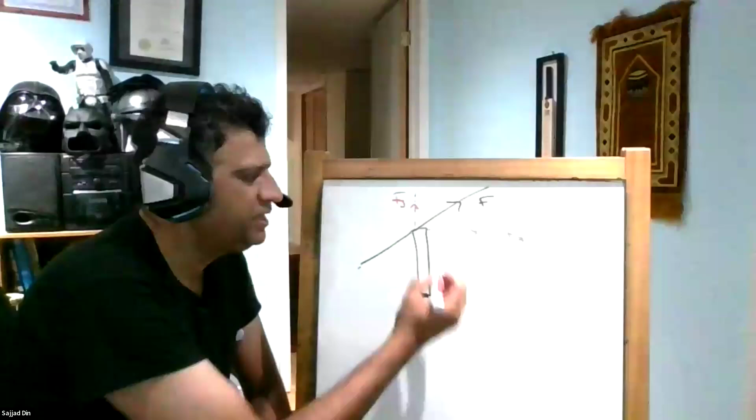So Varignon's theorem, what does it say? That you can split this up into its components, Fy and Fx, and then you can calculate the moment around this. Why? Because this might be a lot simpler. The perpendicular distance might be a lot easier to calculate as opposed to, in this case, where the perpendicular distance is actually this much, but it might be a little bit hard to calculate. So that's what's going on here. That's what we're trying to achieve.

We can now use Varignon's theorem to calculate the sum of the moments around an axis by using the components of the force. So in this case, if you've got F and you're trying to calculate the moment of the force F around A, you can split it up into its Fy component and Fx component, because hopefully the perpendicular distance for this would be easier to calculate. And then all you do is add the moment of the force because of the y component to the moment of the force because of the x component, and that will give you your moment, the sum of the moments.

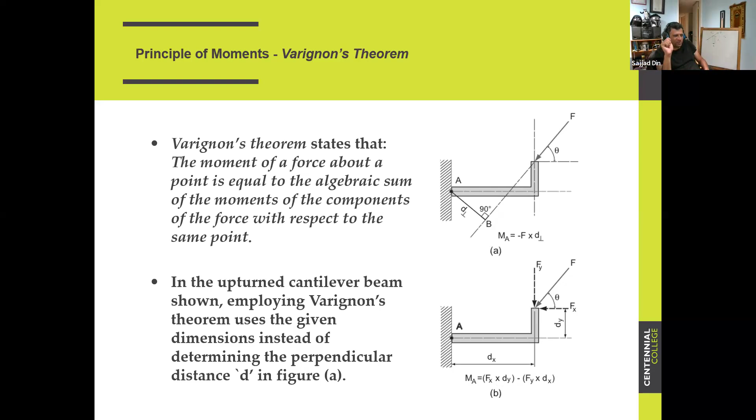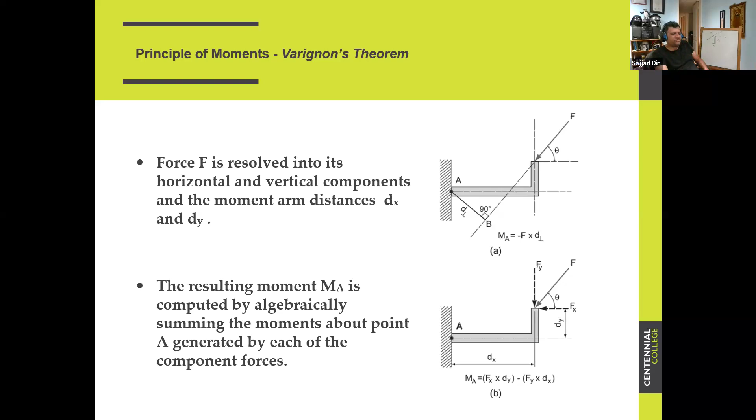And just remember, for Fx, the moment is going to be in a counterclockwise direction, whereas the moment of the force Fy is going to be in a clockwise direction. Always remember, clockwise direction moment is negative. Counterclockwise or anti-clockwise, the moment would be positive. That's basically what these notes are signifying here, that you can now compute the sum of the moments using the components. So let's try to work on a scenario.

So we've got a wind force of 2,000 pounds at an angle of, and I'll give you the angle, from the horizontal. It's applied at a joint A on a roof truss. Determine the moment of the force F about the supports at B and C and the crown at D. So we're going to use the principles of the moments to calculate all that.

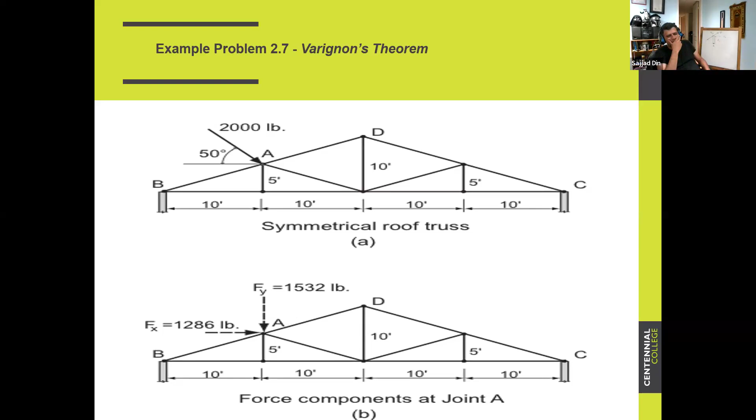So the first thing I want to point out here is that the force is 2,000 pounds. It's at an angle of 50 degrees. So the first thing you want to do is break it down into its x and y components. How are you going to do that? You are going to simply use the angle, 50 degrees, and use SOHCAHTOA. So now that you have Fy, which is 1,532 pounds, and you have Fx, 1,286 pounds, you can now use this information to calculate the moment around the different points.

So let's start off with calculating the moment around B. So if you guys could open this up on your computer, because I can't, I would rather have the focus of the camera on this board or on my desk. To approach this, let's take a look at B. Let's try to calculate the moment of the force around B.

So if you look at the figure, the moment around B is going to be equal to Fy, and you can see in the figure that its perpendicular distance to B from the line of action of the force is 10 feet, multiplied by 10. The next question is, is this clockwise or counterclockwise? It looks clockwise to me, so I'm going to put a minus here. Now let's take a look at Fx. It also looks clockwise, so I'm going to say minus Fx, and the perpendicular distance is 5. Now plugging the numbers in, minus 1532 times 10 minus 1286 times 5.

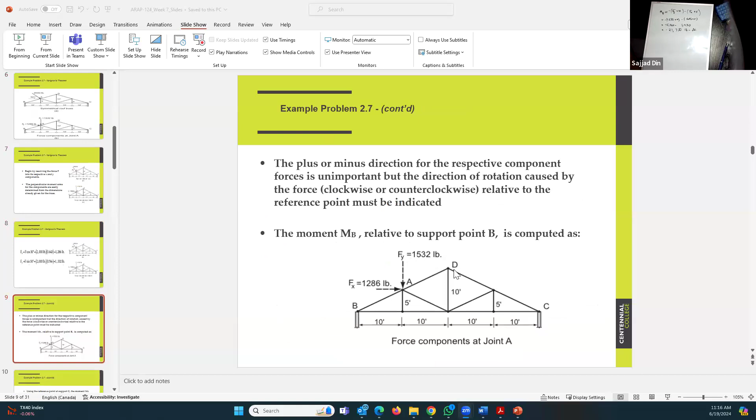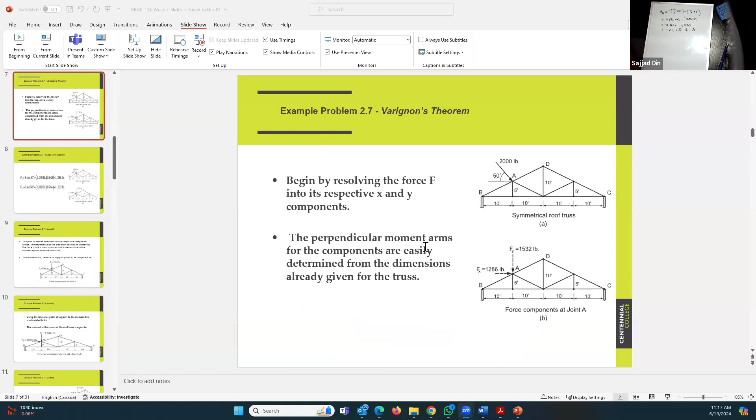Let's go back to, so does this make sense? Right, Fy, that's already done. So when you take a look at the solution, yes, minus 1286 times 5, minus 1532 times 10. So yeah, there you go. We got the right answer. So what I'd like you guys to do is to get the moment of Fy and Fx, the sum of the moments, on D. So I'll give you guys a few minutes to try to do that.

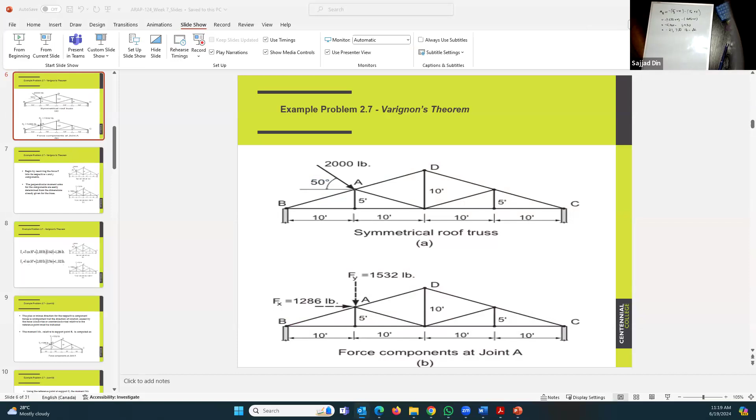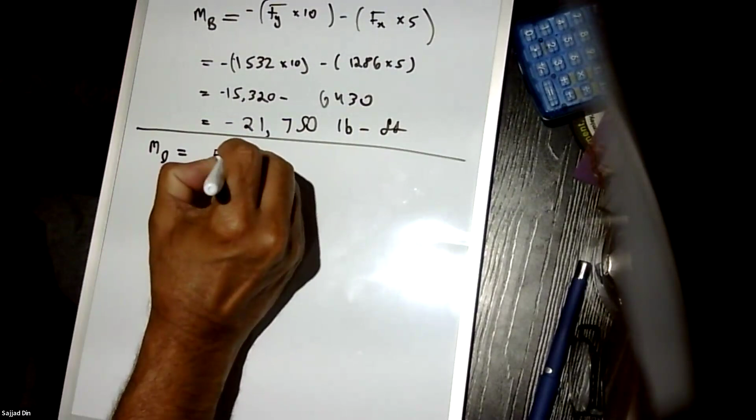Okay, so for MD, I can see that my line of action for Fy is 10 feet from it, and it is counterclockwise, so I'll leave that as positive. And Fx, which is also counterclockwise, so I'll leave that as positive, Fx times 5. So what does that give us? 1532 times 10 plus 1286 times 5.

Answer is 15320. Again, 21750 pound feet, but this time it should be positive.

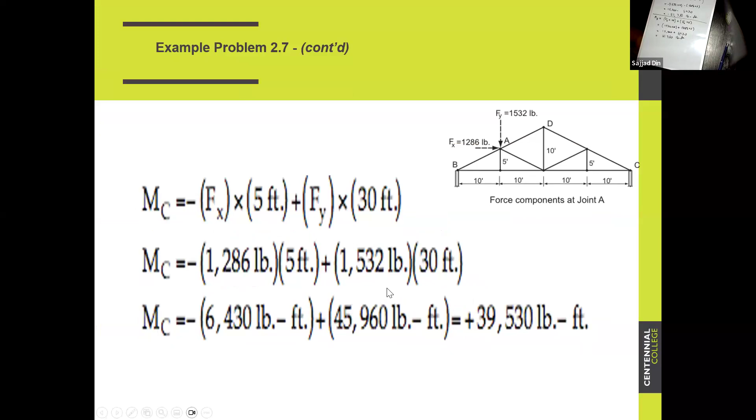I'm a little confused about why D was 5 feet instead of 10. Are you referring to MD when I was calculating MD? Yes. So we multiplied fx by 5 feet. If you extend the line of action of force fx all the way across, what is the perpendicular distance between that line and D? Is it going to be 10 feet or 5 feet? Why would it be 10 feet? The line of action of force passes through here. Okay, I see. So just extend this and then look for the perpendicular distance. Okay, I understand now. Thank you.

And that's going to be the main challenge, trying to figure out those distances. If you can figure that out and you can remember clockwise and counterclockwise, you're going to do quite well with this part of the course, moments of forces. If you don't, that's where the errors set in.

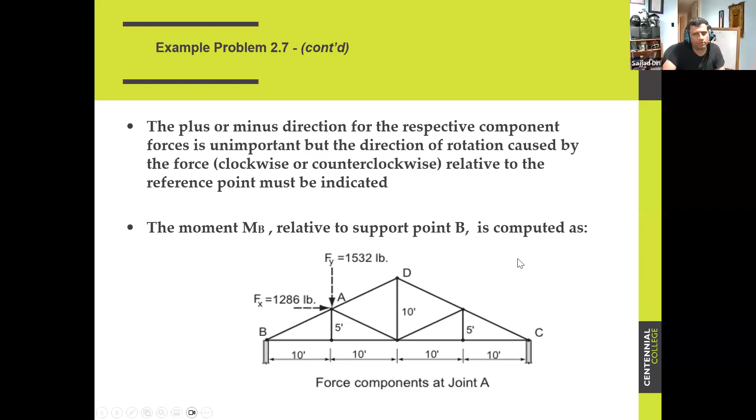So the next example. Well, not example, just a brief discussion on a couple. It's basically an arrangement of forces that creates a rotational effect, and it's a series of parallel forces. And so that's another type of problem that we're going to be solving, where we've got forces that create rotation of a structure or a plank. But the principles are the same for the calculations. But this is the first example.

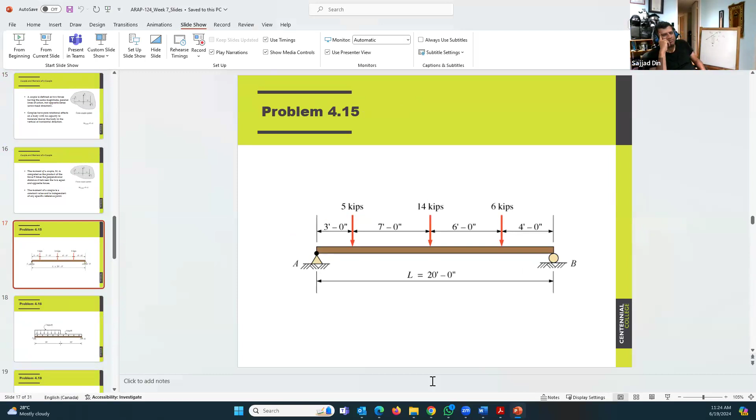So in order to solve this, right now what I'm going to suggest is that you just work on determining the rotational force, the sum of the rotation around A and B. So let's go ahead and try this. So what I'm going to do is I'm going to solve the sum of the moments around A. That's the first thing I'm going to do.

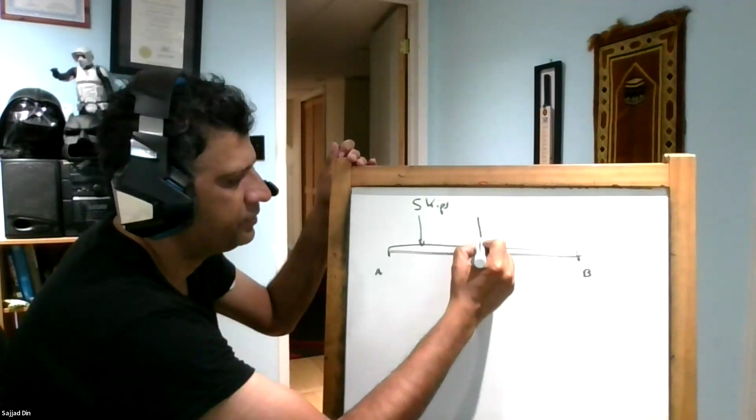But just remember, you've got the plank-like structure. You've got A, and then you've got B. And you've got 5,000 pounds or 5 kips here, 14,000 pounds or 14 kips here, and 6,000 pounds or 6 kips here. So open up your figure so that you know what you're looking at. So let's draw this with a different color. This entire length is 20 feet. Very important. Next, this distance here is given as 3 feet. This distance from 5 kips to 14 kips is given as 7 feet. This distance is given as 6 feet, and this distance is given as 4 feet.

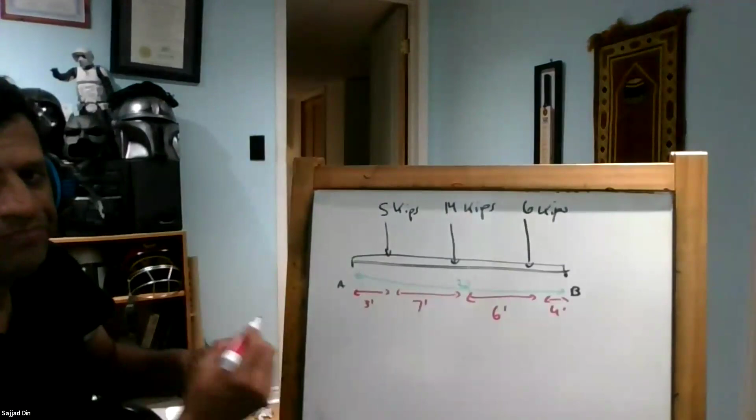So for the moment around A, let's calculate the moment around A. So MA, so the sum of the moment is going to be what? 5 kips times, what is the perpendicular distance? It's from here to here. The line of action of the force, 3 feet. So that's number one. Is it counterclockwise or clockwise? It's clockwise, so it's going to be negative. Remember, if you were to push something around A in this direction, it's clockwise. So they're all going to be clockwise.

So it's going to be 14 times 7 plus 3 is 10. 6 times 6, what is this, 10? So that will be minus 6 times 16. So that'll be minus 15, minus 140, minus, what is that? 6 times 16, 96. What is the sum? 140 plus 15 is equal to minus 251 kips feet, 1,000 pounds feet. Remember, what does kips mean? It's 1,000 pounds. That's what that means.

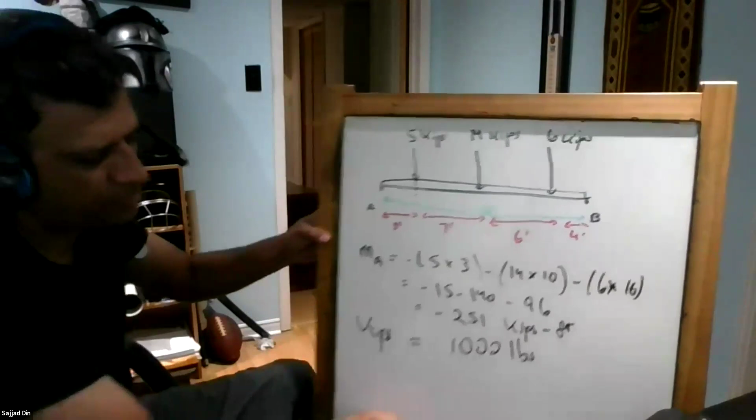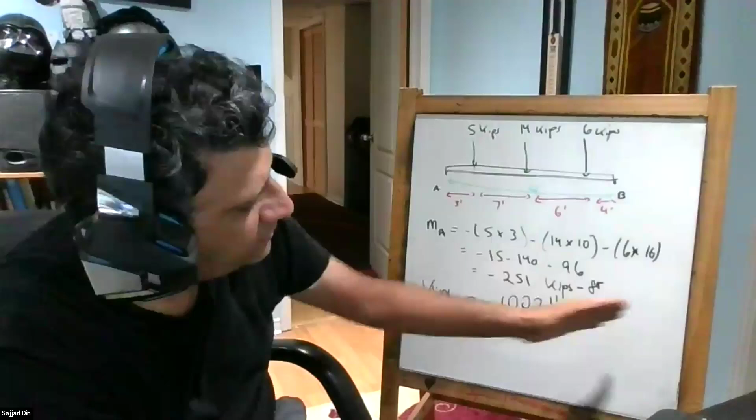So what I'd like you to do now is calculate MB. Got all the forces given. You've got all the distances. Now you're going to be calculating MB, and it's going to be counterclockwise, so that'll all be positive. So I'll give you guys a few minutes to try to calculate that.

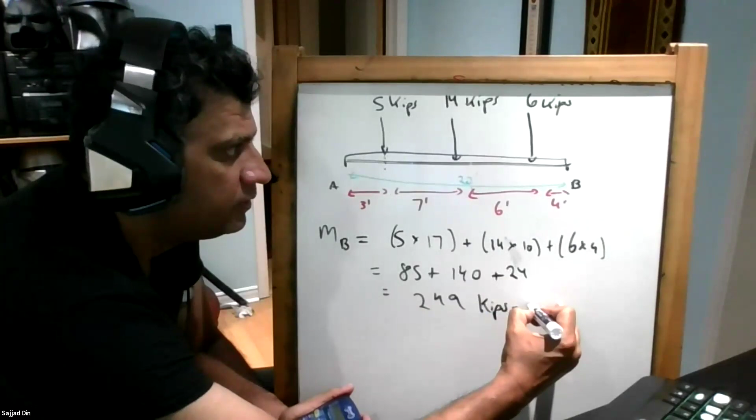Okay, let's take a look at MB. So for MB, the sum of the moments for MB, it's going to be 5 multiplied by, what is that, 7 plus 6 plus 4, 17. And is it going to be positive or negative? It's positive. Same for 14. 14 times 6 plus 4, 10, plus 6 times 4. They're all going to be positive. 5 times 17, 85 plus 140 plus 24 is equal to 249 kips feet. That would be your answer.

Is anybody unclear? If this is static, wouldn't there be a counter torque on B for A? Yes, there would. So what you've just mentioned is exactly correct.

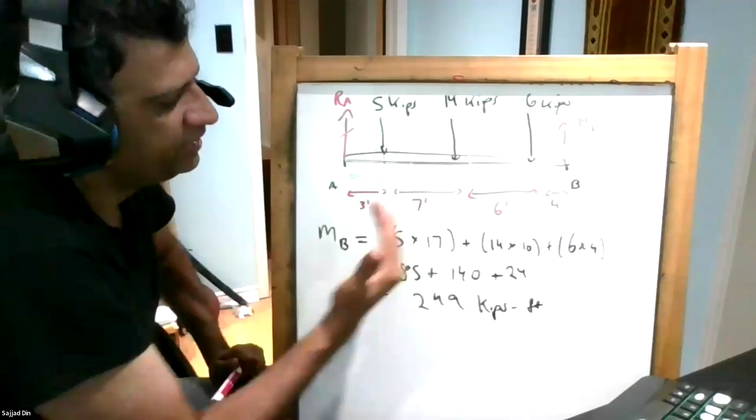In reality, what ends up happening is that there is a reaction, RA, from the Earth, and there's a reaction, RB, from the Earth. And actually, that would be countering the moment. So yes, you are exactly correct. But if you're just calculating the moment, that is what we're getting. And at some stage, you will be getting the reactionary force from the Earth, in an upward direction. So if the plank is pushing down on B, the Earth pushes back up. That is correct. Good point.

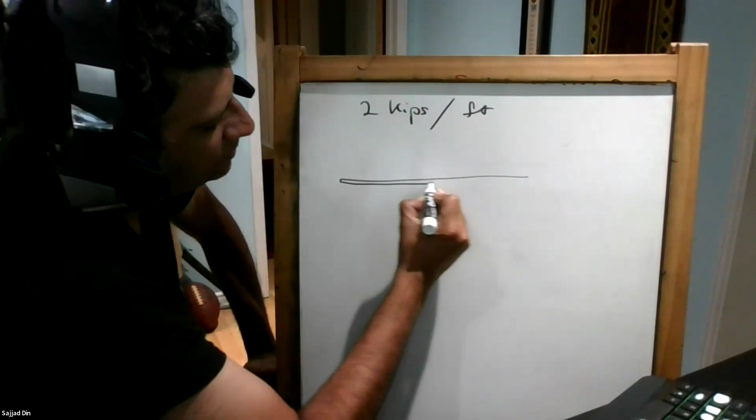So the next thing that I wanted to bring up, if you go to problem number 4.16, you will see something that's quite important. You're given a number, 2 kips per feet for a structure. But how long is that structure? If it is 16 feet, what is its weight going to be? If its density is 2 kips per feet and its length is 16 feet, the weight is 2 times 16, which is equal to 32 kips.

But where are we going to show that force? Right in the center. Why? Because it is equally proportioned. If it is a regular body, like a box or a plank, and if you were to split it down the middle, it would be an exact image of each other, both sides. You can just show the force acting in the center. However, if you have an irregular body like this, and you're showing weight, where will you show the force acting down from?

Well, you have to calculate the center of mass, center of gravity, and that's what you're going to be doing towards the end of the course, because this is an irregular shaped body. But right now, you don't need to worry about that. That's coming up later on. That is something that you will become familiar with as you come closer to the end of the semester.

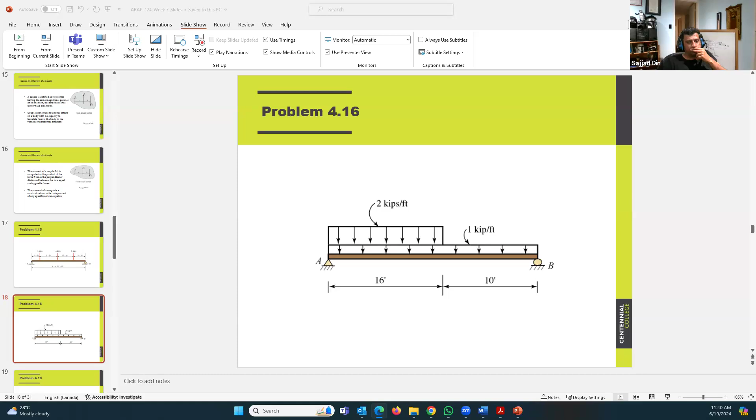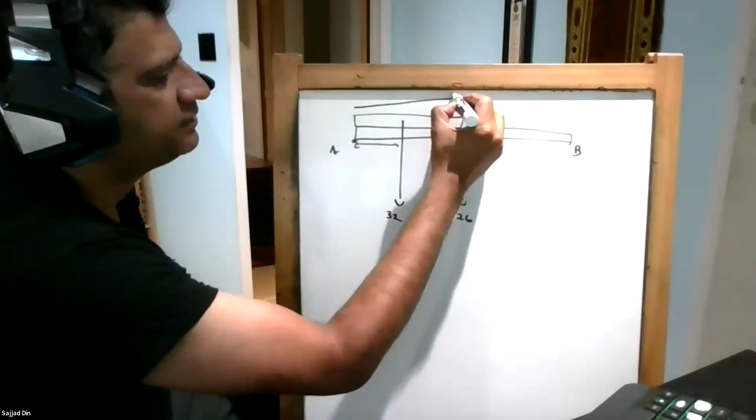Okay, let me try to solve that for you guys. The way this is now set up, once you've determined based on the density what your two planks are weighing, this is the first plank, second plank. So we know this is 32, and we know this is 26. So at A and B, what are the moments going to be? Well, first you determine the distance. So we know that this is 16 feet, so that means this is 8 feet.

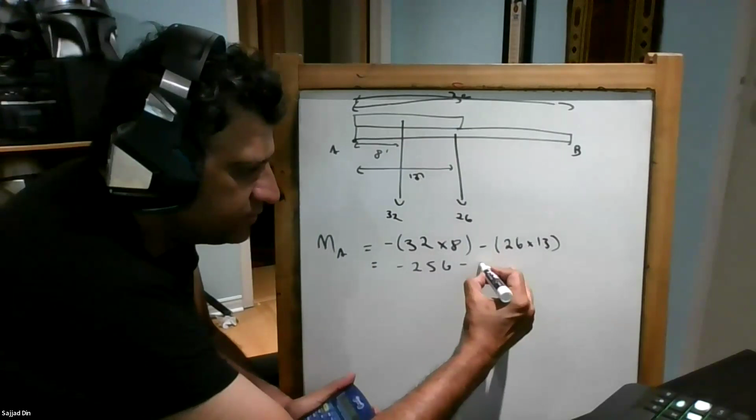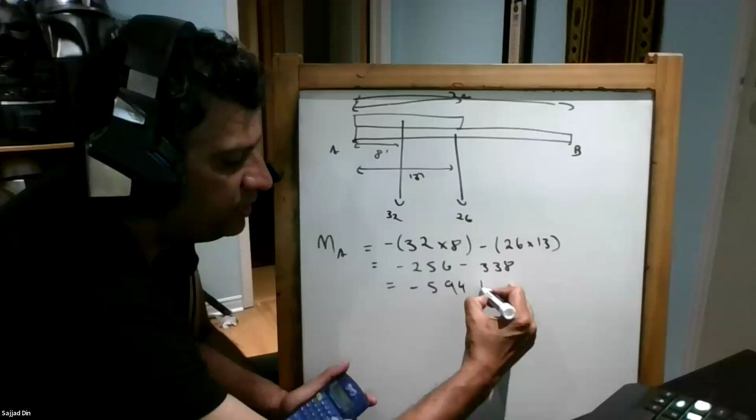So moment around A, because of this, is going to be 32 times 8. Now the question is, is it going to be clockwise? Yes, it's clockwise, so negative. And remember, this entire length is 26, so this length to here will be 13 feet. So this is going to be minus 26 times 13. 32 times 8 is 256, minus 26 times 13, minus 338. So that's going to be minus 594, and the unit will be kip feet.

Did you guys solve this? And if you did, is this what you got? And if not, why not? What is the error?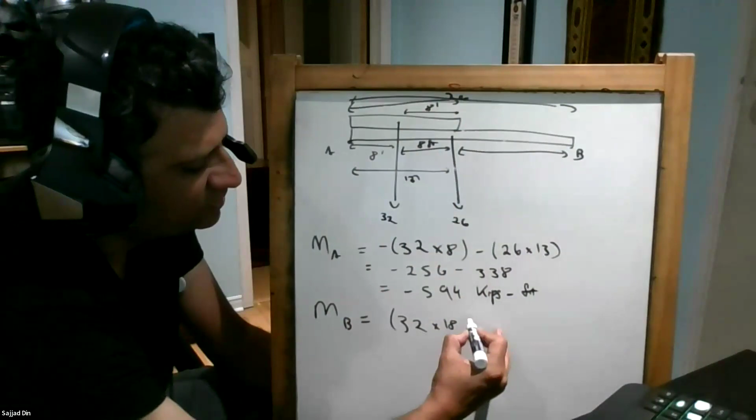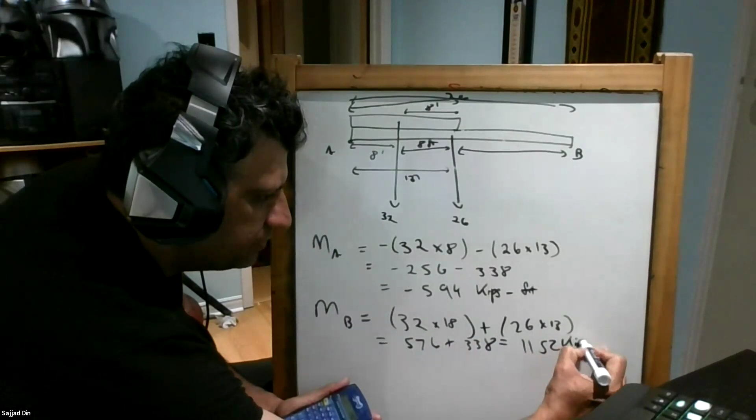So it's going to be 32 times 18, and it's going to be in a counterclockwise direction, so it'll stay positive, plus 26 times 13. So you should be able to get 32 times 18 is equal to 576 plus 338. So the answer would be 1152 kips feet.

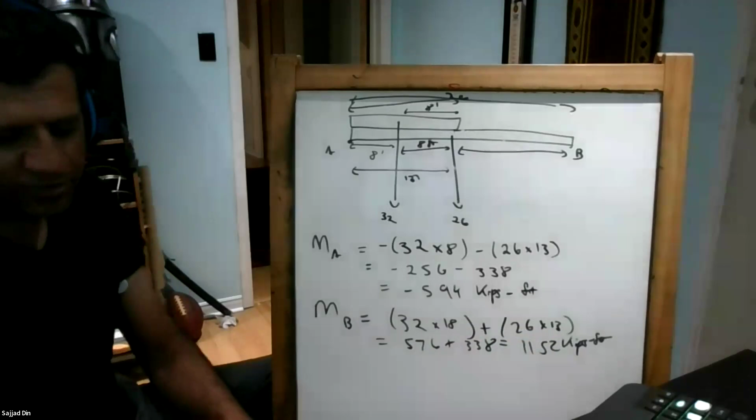Sir, I got a different answer. I got 914. Okay, that might be correct. What do you get? Did I use the right number? Yeah, it was just the last calculation. So 26 times 13 is 338. So maybe I made a mistake here. Let's double check this. I might have added it incorrectly. So 576 plus 338. Yeah, 914. Thank you. I must have fat thumbed it. So the actual answer is 914.

Let's try to do one more example before we move on to a break. Take a look at this question here. So how are we going to solve this?

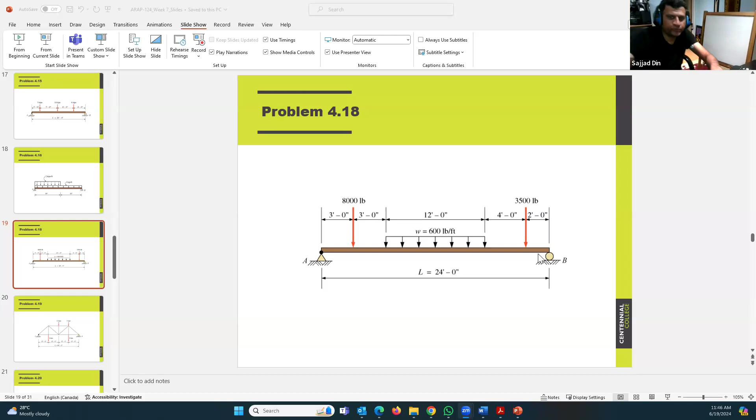Let's take a look. So only two of the values are given: 8,000 pounds and 3,500 pounds. But then you've got 600 pounds per foot. So let's go ahead and try to solve this. So we've got a plank, and we have a weight at this location, 8,000 pounds. And we have another weight at this location, 3,500 pounds. And then we have something in the middle, which is 600 pounds per foot.

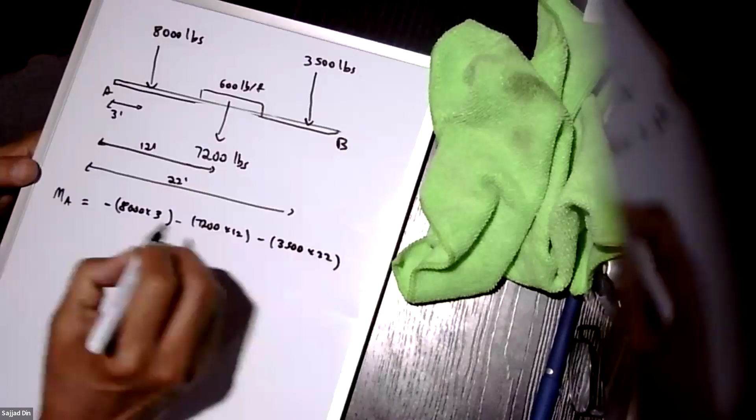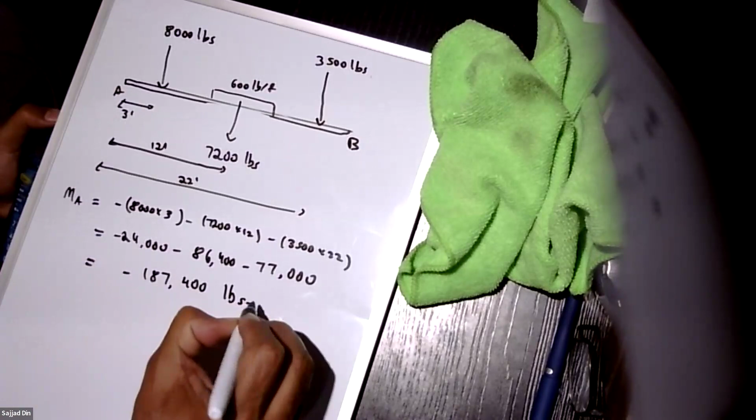Okay, let's go ahead and solve this. So MA is going to be equal to 8,000 times 3. It's clockwise, so it's going to be negative, minus 7,200 times 12, minus 3,500 times 22. So that should be 24,000 minus 86,400 minus 77,000. So your answer should be, hopefully I get this right, minus 187,400. And what is the unit? Pounds feet. That is the moment around A.

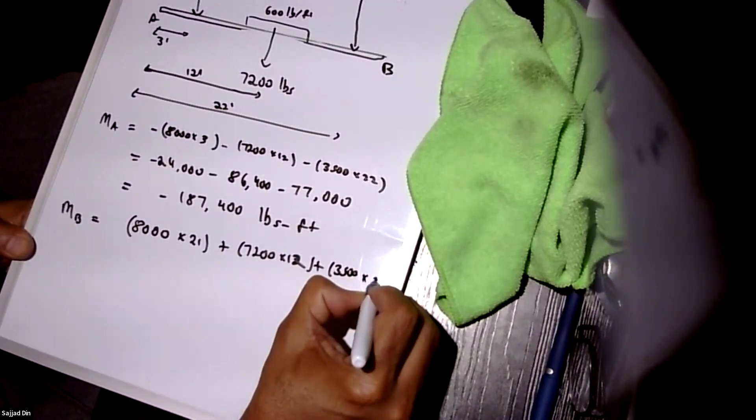You basically do the same thing to get the moment around B. In that case, it's going to be positive because it's counterclockwise: 8,000 times 21 plus the same 7,200 times 12 plus 3,500 times 2. Whatever the answer is, you should express it in pounds feet. So there you have it.

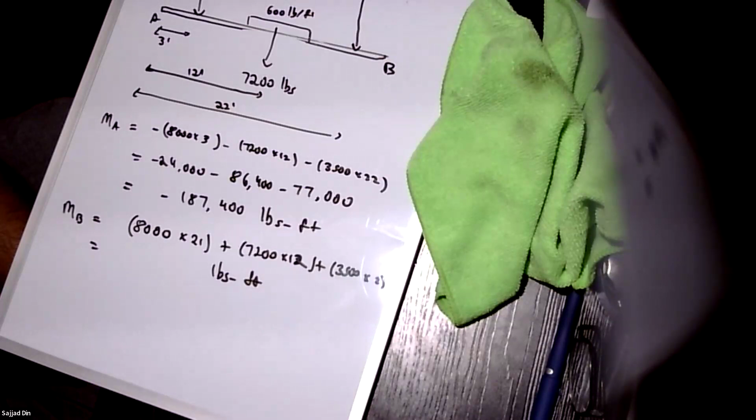Any questions? I find that with this type of exercise, these type of calculations, the best way to approach them is to just break everything down, try to look at the structure in as simple a manner as possible. Okay, so let's erase this, assuming you guys are understanding this. So when we come back, we'll work on this example here. All right. So see you in a few minutes.

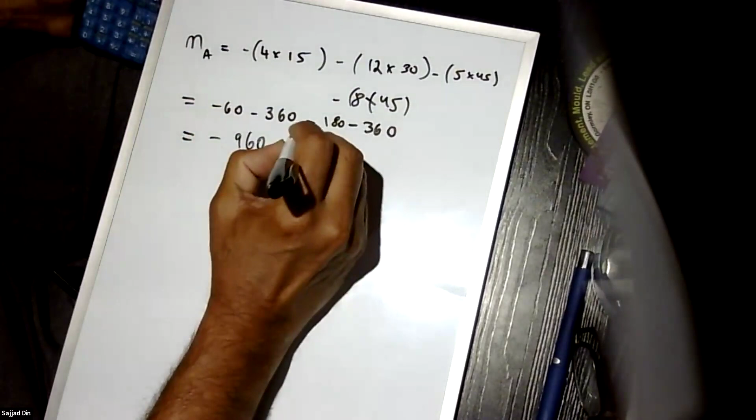It's 4 times 15, that's minus 60. 12 times 30, minus 360. 5 times 45, minus 180. 8 times 45, 360. So your answer should be minus 960 kips feet. It's for MA.

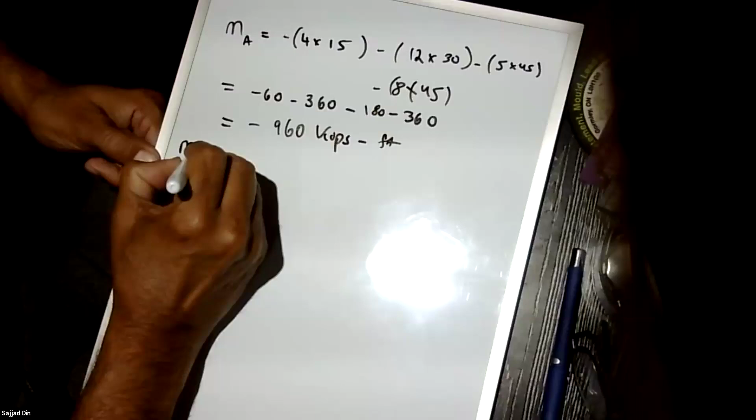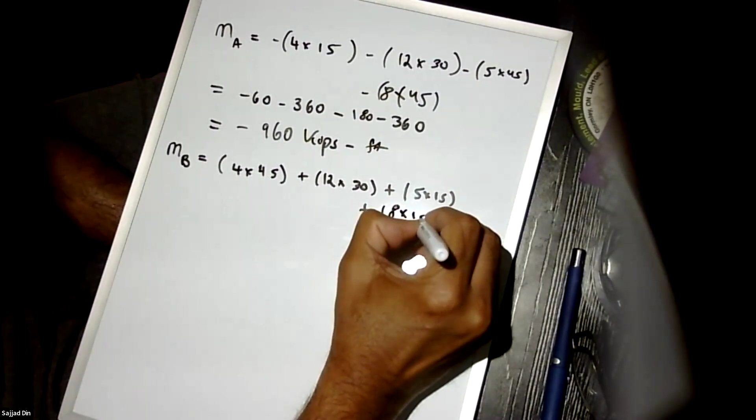For MB, these are all counterclockwise, so they'll be plus. So it'll be 4 times 45 plus 12 times 30 plus 5 times 15 plus 8 times 15. Remember, we're looking at B now. It's 180 plus 360 plus 75 plus 120. The answer is plus 75 plus 360 plus 180, 735 kips feet.

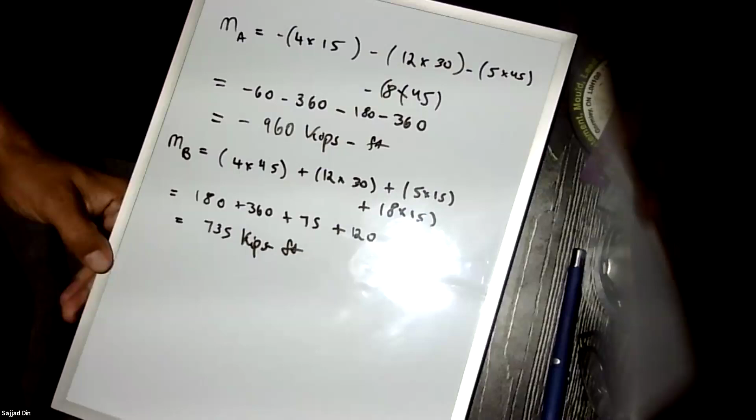Is that clear to you guys? Just to refresh. Can you check your 8 times 45, I think? What is 8 times 45? Or was it 5? Let's just check this on MA. For some reason, I'm having a hard time. Oh, did I miscalculate that? I think maybe. I might have.

So 8 times 45, should it not be 360? Maybe it was the 5. I think it's the 5. It was the 5 times 45. Okay, so what should that be? 5 times 45. Did you get 225? Should be 225, not 180. So your answer, what is your answer? Negative 1005. That is correct. Negative 1005.

Do you guys feel comfortable enough to attempt the assignment questions now? Or should we do one more? Yes, you want to do one more? Okay. All right, let's do one more. So do you guys want to do this one?

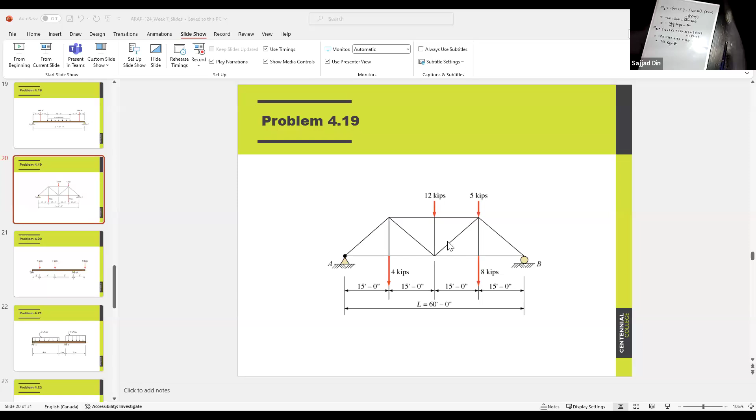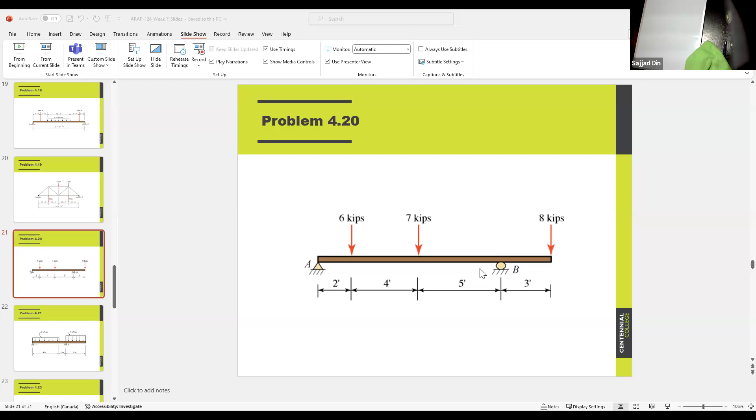Okay, let's go ahead and solve it. Hopefully we'll get the right answer. Okay, so I would do this for MA. It will be clockwise, so it's going to be negative. 6 times 2 minus 7 times 6 minus 8 times, how much is that? 6 and 14. Correct me if I'm wrong. 14 minus 12. Go ahead and get the calculator. So I think this is 42. 8 times 14, 112. Well, I'm getting 166 kips feet, and it's negative. Hopefully that's what you guys are getting.

For B, since it's counterclockwise, 6 times 9 plus 7 times 5. Now 8 is going to be clockwise, so it's going to be negative, 8 times 3. So 6 times 9, what is that? 54 plus 35 minus 24. So the answer should be 65 kips feet. Are you guys getting the same answer? Or am I in error somewhere? Yeah, that's the same answer I got there.

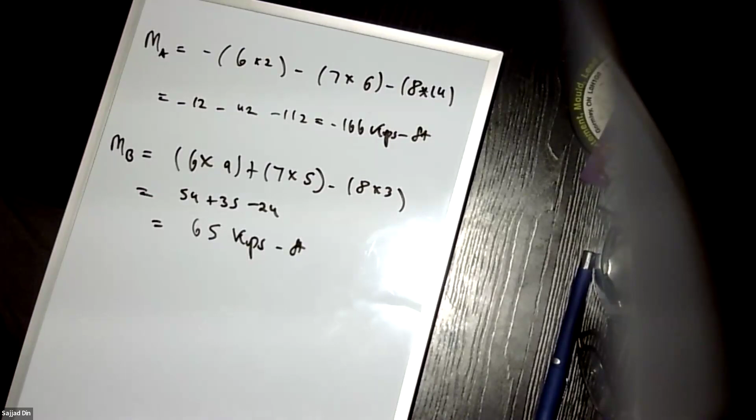Good. Usually, as long as you get the concepts, the only source of error is if you get the orientation wrong, or if you somehow miscalculate something, or it could be a careless error, which happens. But hopefully in the test you'll be fresh and you will not make an error. So now in order to make sure that you are getting the concept, let's open up assignment number 3.

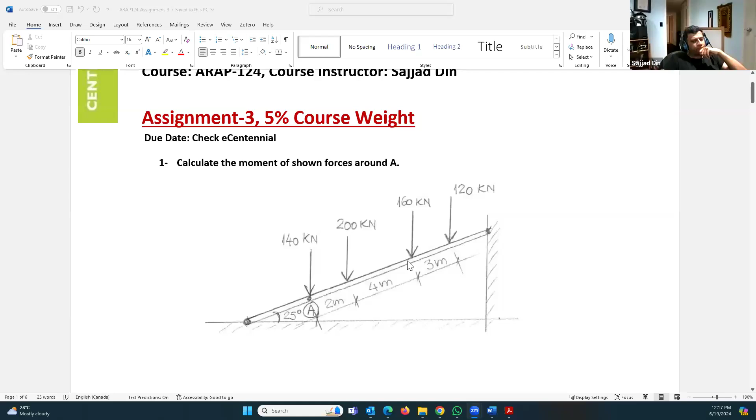So for this question number 1, you've got 1, 2, 3, 4 forces. And you're looking for the sum of the moments around A. You've got this angle here, 25 degrees. Right off the bat, 140, it's going to be 0. Why? Because it's passing right through A. You remember that. There's no perpendicular distance, so it's going to be 0.

Now, let's take a look at the others. Be careful about this distance because you need to calculate the perpendicular distance. What do I mean by that? So let me show you. This is A.

What is this? 200 kilonewtons. This distance is 2 meters. And we have this angle, 25 degrees. What's the distance you need to calculate?

So we can use cosine to do that. Cosine 25 degrees is equal to, let's say this is D, D over 2. So D is equal to 2 times cosine 25 degrees, which is 1.81 meters. And that is what you're going to use in your calculation. If you don't do that, you will get the wrong answer.

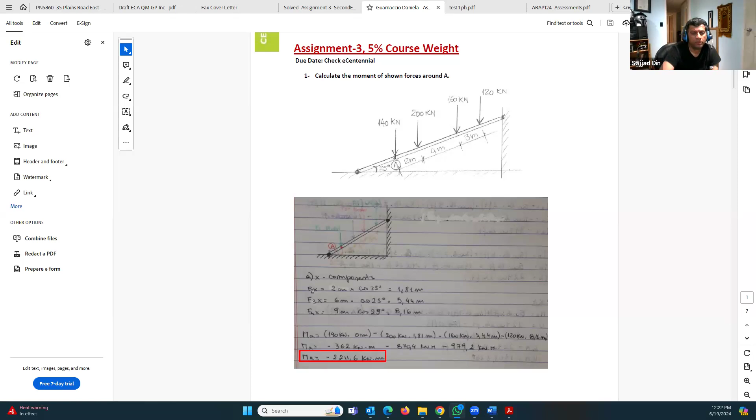Okay, hopefully we'll be able to get that one correct. So the answer, MA, is going to be minus 2211.6 kilonewton meters. Oops, kilonewton meters, not kilometer newtons. Okay, so that's what we were looking for.

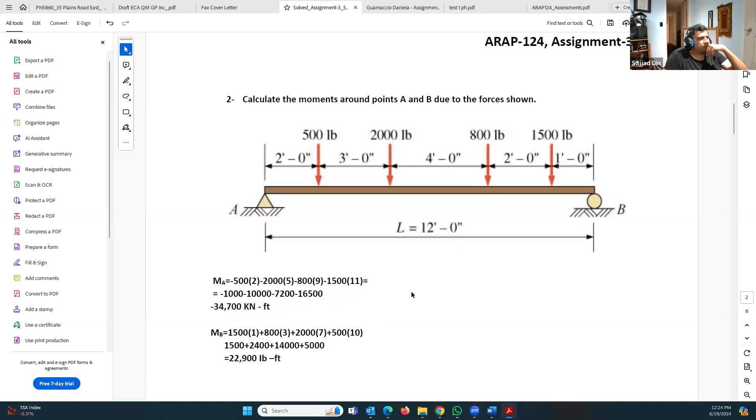So for the second question, it's pretty straightforward. For MA and MB, we've done several examples that are similar. This is the solution, so I don't anticipate you having too many problems here. But just keep in mind, this is erroneous. This should be pounds feet. So for 2, you guys catch up. 3 is a bit of a challenge, but I'll clarify how I think you can get it done.

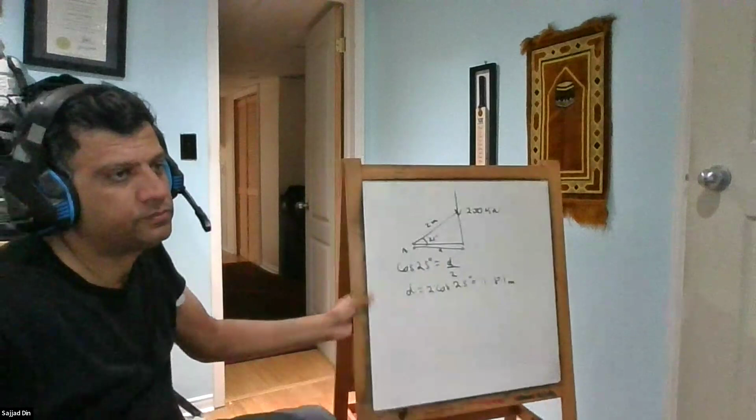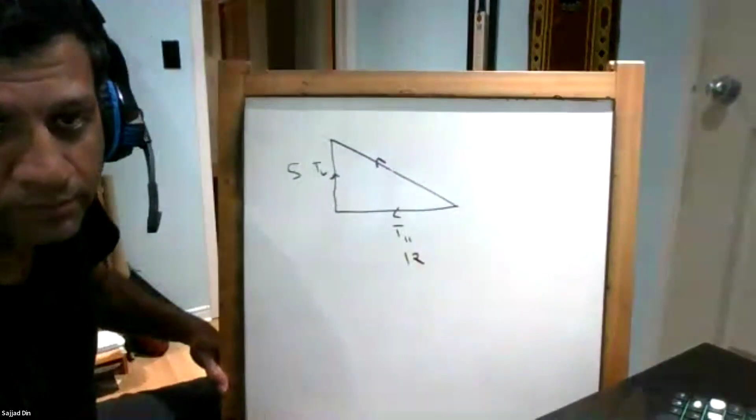You do have T, but you've noticed that they've given a ratio. This is T horizontal, T vertical, but they've given ratios. What's the ratio? 12 and 5. If you use that ratio, you can then get 13 over here. How? 5 squared plus 12 squared is equal to, we'll just call this x squared. So x squared is equal to 25 plus 144, 169. So x is equal to 13.

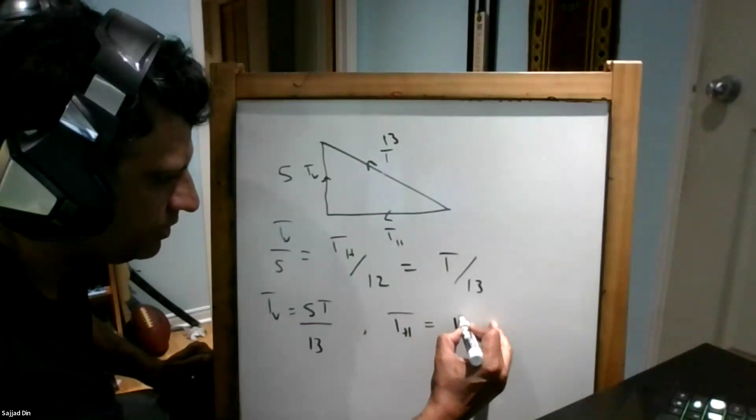So what does that do for us? It creates a situation where TV over 5 is equal to TH over 12 is equal to T over 13. That's what the ratios are for this angle. So TV is equal to 5T over 13, and TH is equal to 12T over 13. You're going to use these in your calculations.

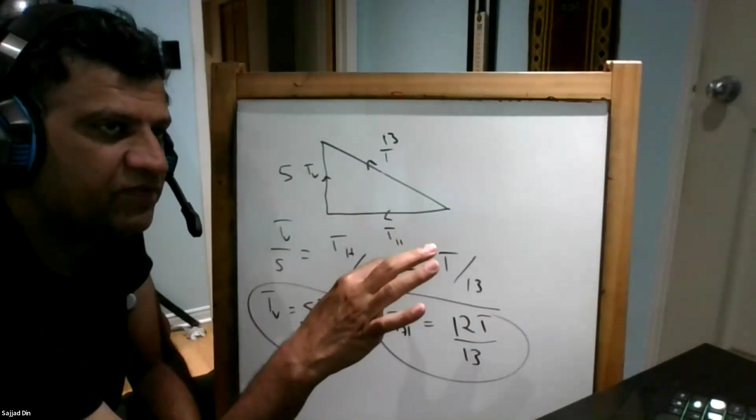Because now, instead of having one force, you have two. And what you're going to remember is that MA is equal to 0. So 0 is equal to TV times 25. That's counterclockwise, so it'll stay positive. Plus TH times 15. And then you just substitute what we have here. So 0 is equal to 5T over 13 times 25 plus 12T over 13 times 15. Move this and then calculate T.

Oops, I think I made a mistake here. We also have to include 300 kN, which is clockwise. So you have to add 300 kN. No, don't get rid of the 13, not yet. Leave it. And you also have to use 300 kN, which is multiplied by, it's going to be minus 300 times 34. So this is the equation you've developed. If it looks a little bit confusing here, take a look at the solution. Maybe it'll be a little bit easier there.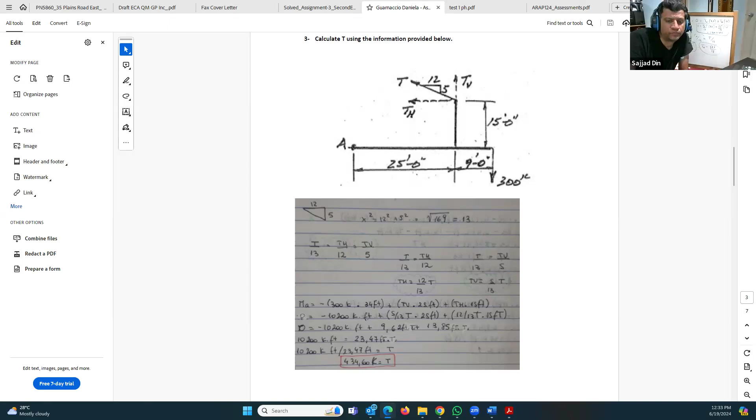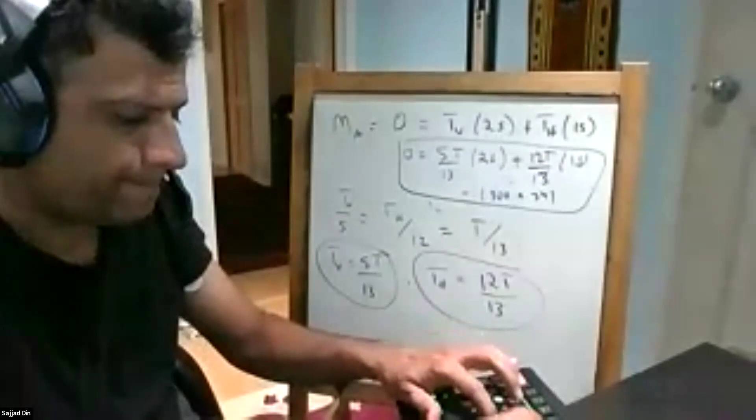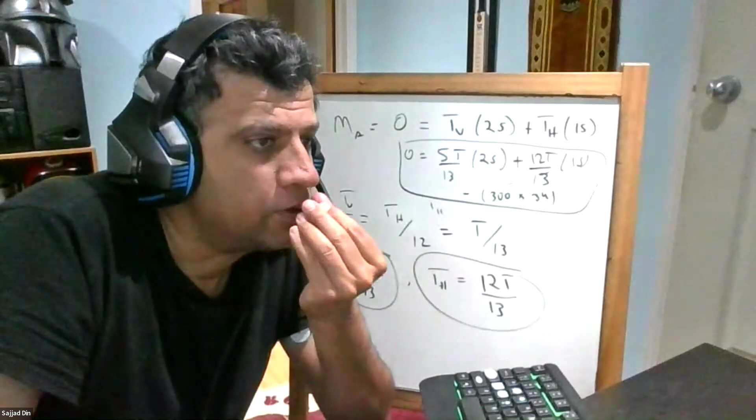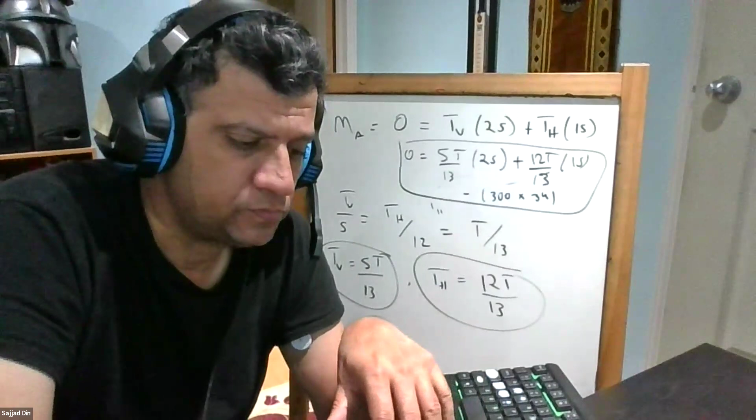The answer for number 3 should be either 434 or 432, and that would be for T. Actually, it's 434. Sorry, not 432. I believe.

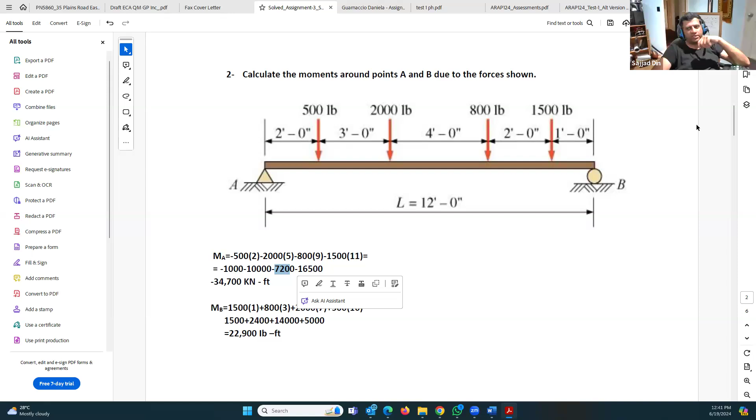So now, shall we move on to number 4? Another minute or so.

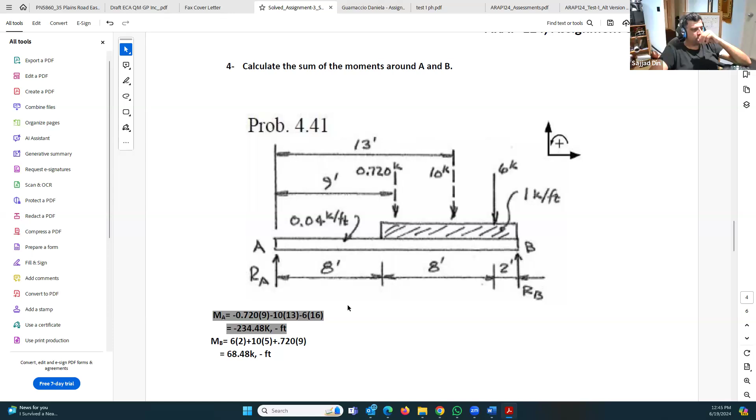it's already calculated here. So there's only 3 forces that you have to worry about to calculate the moments around A and B. 1, 2, 3. That's all you have to use to calculate the moment around A and B. And I think this might not be 234, it might be 232, but okay. So go ahead and finish that.

And then for the last two, I'll give you guys hints, and if you want to stick around, you can finish them or you can head off. Usually you guys leave after 2 hours, so it's up to you if you want to stick around. But once you've finished 4, I will, in this recording, give you guys tips for 5 and 6, and then it's up to you when you want to finish them. You have till the 24th to submit. And I think the link's open. So let me know once you've done 4. I'll give you the tip.

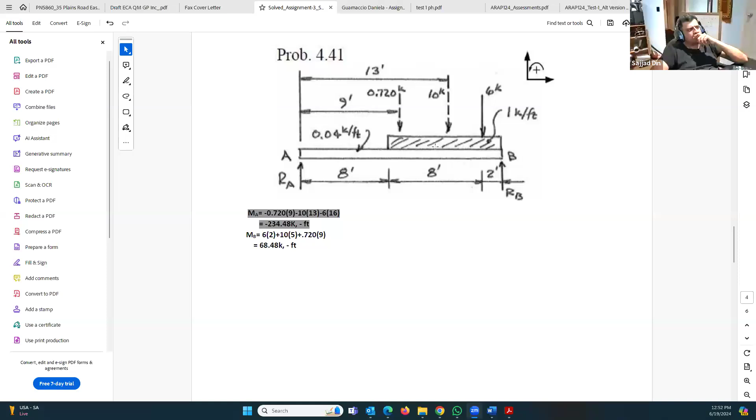Okay, so let's take a look at number 5. In number 5's case, did we finish 4? Let me just make sure. I'm assuming you guys have finished 4. And here are the answers. So now take a look at number 5. In the case of number 5, the answer is the same for both, but the way you get to it is a little bit different. So you're looking for MA and MB.

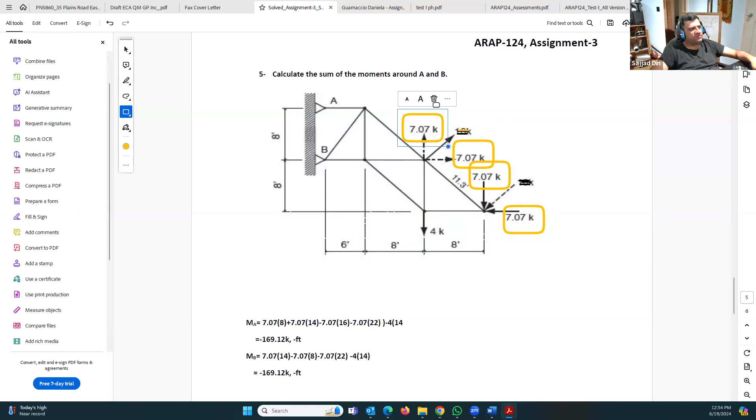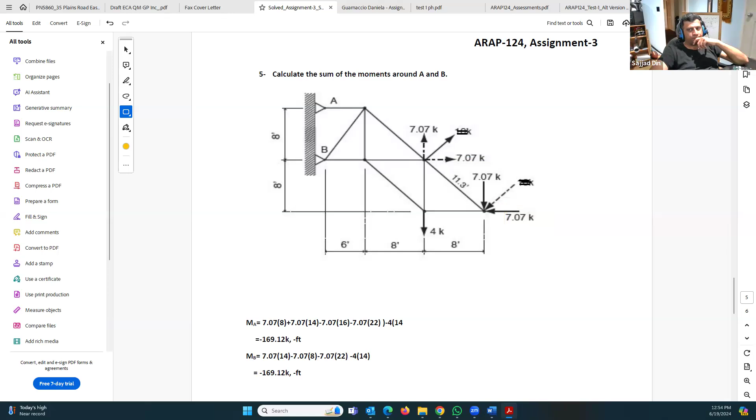So when you're performing the calculation, just look at the directions and make sure that you understand the distances. Okay, so I'm going to start deleting this so it's not too confusing. Let's go ahead and get that done. And then if you want to verify the answer with me, you're good to go.

And for the final question, what you're going to do is just focus on 200 newtons, 500 newtons. That's all you have to focus on. For MA, now just ignore the resultant and just get the moments, where we haven't been practicing resultant that much, so I'm not going to ask you to get that.

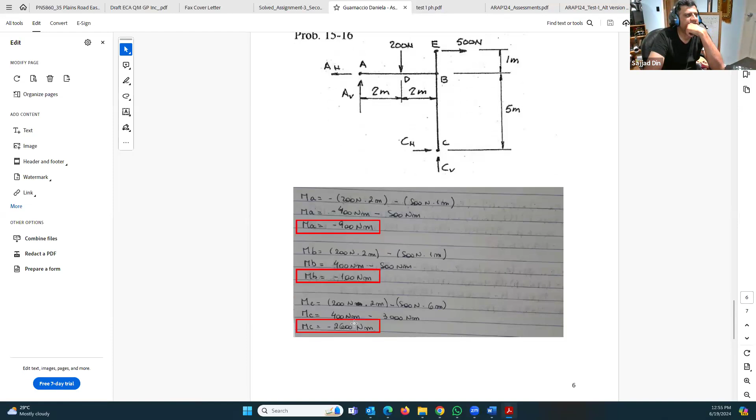But MA: 200 times 2, and it's clockwise, so it's negative. 500 times 1, and it's negative. That's how you get this. MB, this is B. 200 times 2, it's counterclockwise, so it's positive. 500 times 1, it's clockwise, so it's negative. That's how you get that. And same with C. And that will be the end of this assignment.

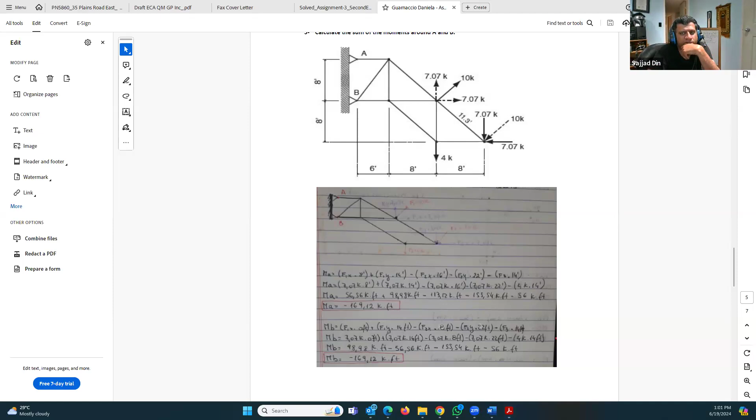If you guys are done, or if you feel like you've gotten enough, you're free to go, and all the best. But if you want to, I'm going to stop the recording soon. So I'm just going to share what I think are the solutions for the final one, question number 6.

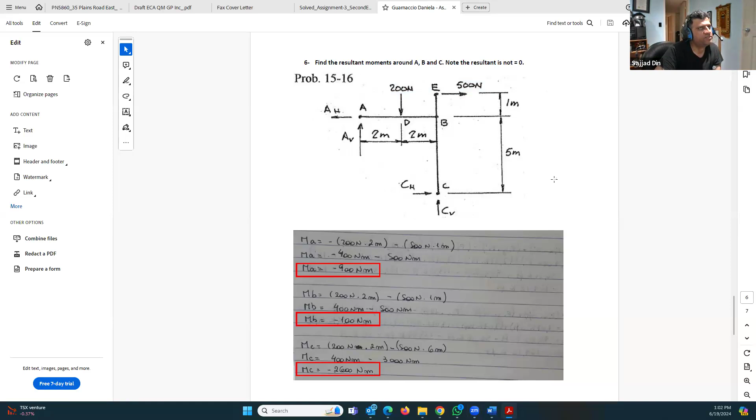Just make sure you are focused on number 2, on 200 newtons and 500 newtons, and take a look at how it should be done and how it's oriented. So just don't get the resultant. Ignore the resultant, just get the moment around A, B, and C, and I'll consider that correct. Okay, so I'm going to stop the recording now, so that'll be available fairly soon, once the class is dismissed.